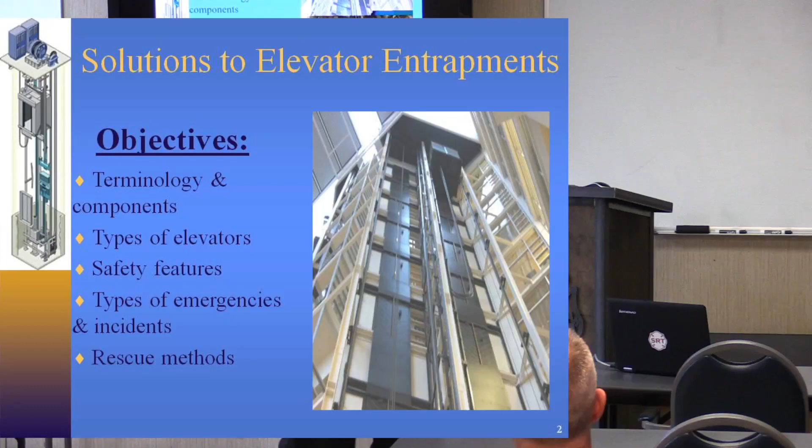I want to make sure the information I'm giving you is for public passenger elevators, not residential. When we talk about the anatomy, the machinery, and some of the different components, I'm giving information on public passenger elevators, because some of it will contradict residentials if you've had experience with them.

So we're going to go ahead today. The objective for today: in this morning session we're going to cover the terminology and components, talk about different types of elevators and their safety features, the difference between an emergency, an incident, and an entrapment, and obviously what we're here for is rescue methods. Give or take questions, we'll be in the classroom for about 3 hours.

After that, I've been told we're doing a working lunch, or kind of a quasi-working lunch. Afterwards, representatives from your agency have already predetermined elevators that I know nothing about—haven't been to them, don't know what they are. We'll go out and I'll show you my procedure, taking you from simple to complex, ultimately ending up picking the elevators with the kits that'll be on your rigs, okay?

And I'm here as long as you guys want. The class is typically 8 hours, I was told we go till 5. I get it, we're in the fire service, you guys got to go back for dinner, some of you may be disrupted for calls. I'm not watching my clock. That 8 hours—it's not that I'm loading up and going.

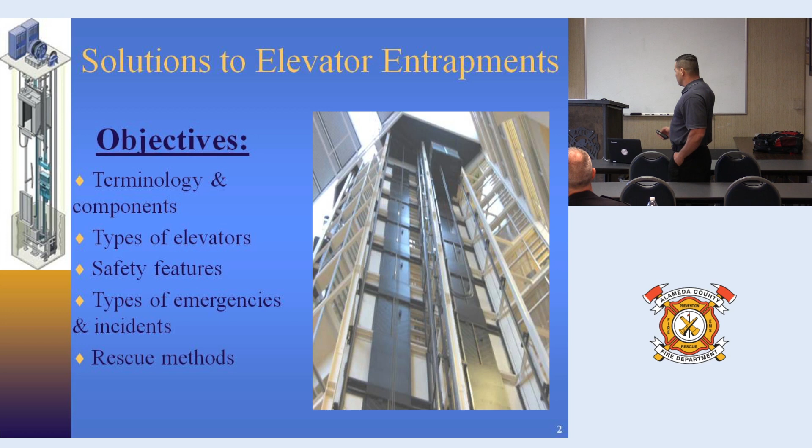If we're in the middle of something, or maybe another elevator comes up that we didn't set out to attack today, we'll go to it, all right? You'll find out I want to give you as much as I can while I'm here. When I leave, anything that comes up that we didn't address today, feel free to get a hold of me.

All right, so remember as we go through this: all elevators are not built the same. Elevators installed in different time periods conform to different requirements and codes. Elevator features and operations may vary from one elevator to another. We're going to see that today.

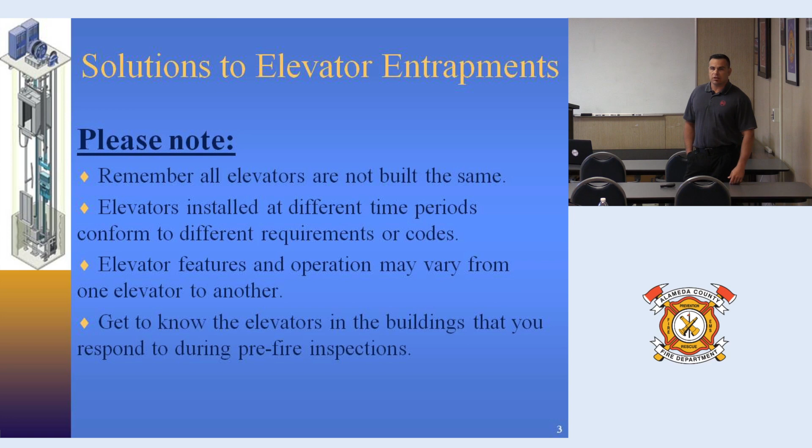Get to know the elevators in your district. I don't know if you guys do engine company inspections, but if you don't, you're getting out, you're pre-planning. Hopefully after this, like the agencies I've been to, I've motivated them to get out and assess their elevators, figuring out what they are and implementing what I give you today. After you clear a call, you're on a medical aid—take a look in there, hit the elevator, open it up, look up inside, look around, all right?

So just like you see here, I don't need to beat that up, but we'll get into the anatomy and then the physiology. I'm going to explain to you how the elevator works and why we can do the things we're going to do today.

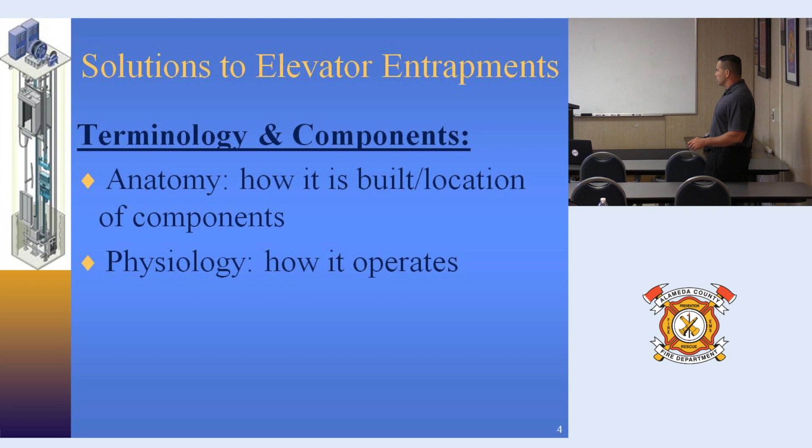Before I get too far ahead of myself, the start of where we're going to go through this PowerPoint—your handout follows along with it as well. We're going to get into all the different components of the elevator, so when we go out and reference something this afternoon, I want you to know what I'm talking about, all right?

What I've done here, as we go through some of these different components on the elevator—this is for my visual learners in here, like myself. Imagine this: if you were somewhere and you were going to hit the call button on the wall to call the elevator, that's a hoistway door you're looking at right now, okay? So if you're in the lobby of an elevator, you push the call button, you're looking at the elevator waiting for the damn thing to open because you want to go somewhere. That's what you're looking at—the hoistway door, okay?

Now I'm going to turn this around, and what you don't see on the other side when the elevator is closed is what we're going to be talking about here. So where that's saying interlock box—this is the interlock box right here that's up in the header of the elevator, okay?

And that's what I'll get to in a second, is what retains the keeper, all right? So as you see there, when you go out into your districts, you'll see this happens to be a Dover. Some of them are just a label that's stuck to it, some are riveted, and some are engraved.

But the program that I've put for you today, it's not an always, every time, it's a majority, okay? So the kit that I've provided for you is not based on what the manufacturer of the elevator is, it's based on what the door hardware is, all right? But you won't necessarily know that ahead of time. You will be able to go into the machine room or elevator room once you've made access, and you will be able to see what the manufacturer of that elevator is.

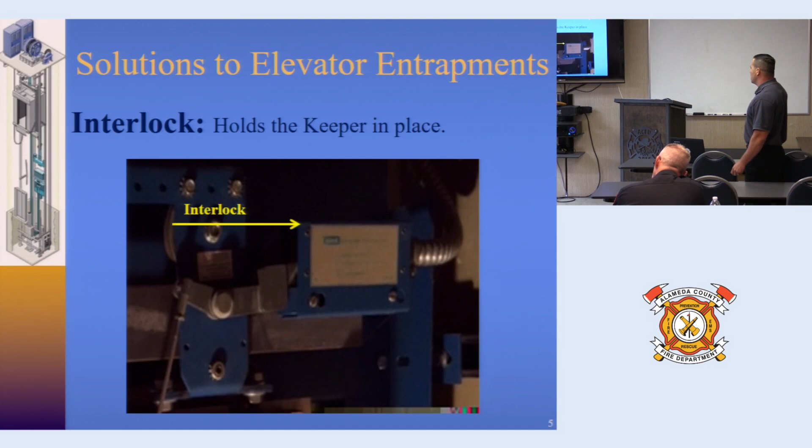So I'm not going to read all this to you, I want to pick up some time because I'm sure you're like me, we want to get to the hands-on stuff. So this follows your PowerPoint, and it basically tells you what the interlock does. The interlock, you see the keeper in the door there in the upper right-hand corner. You'll see coming to the next slide.

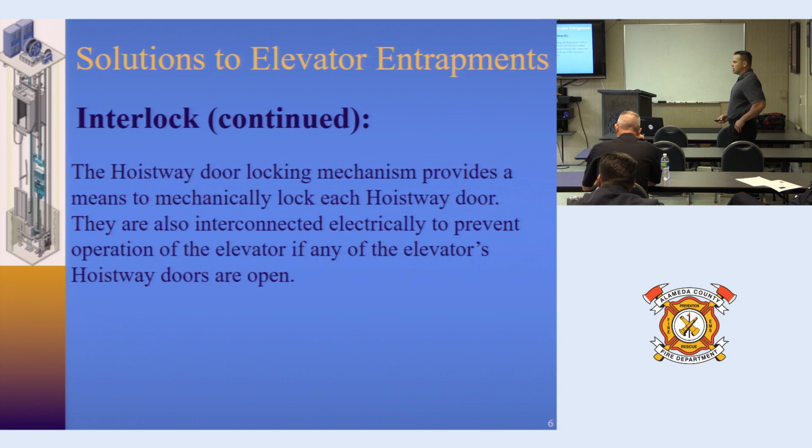What the interlock box does is that's an electromagnetic connection, and that keeper box is a circuit, but it's also a mechanical device that holds that hoistway door locked, so we have security when the elevator runs up and down in the shaft. We don't have an unprotected hoistway or elevator shaft.

It completes a circuit just like on your ladder trucks, the outriggers. So if the outriggers aren't out, it won't let you put the aerial up. It won't allow you to bring the outriggers in if the aerial's up. Same thing here, it closes that circuit and tells the circuit board: hey, I have a hoistway door open, the shaft's unprotected, don't run, or it's closed and secured and it's safe for the car to run.

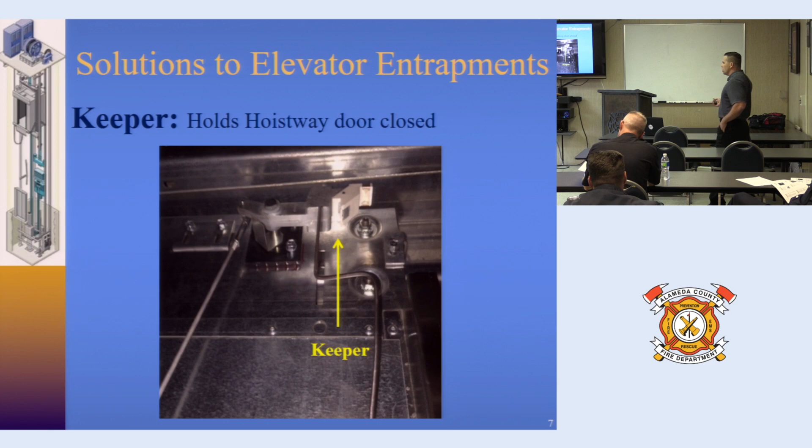We're either going to have door clutches or what you call a bayonet, okay? A door clutch will always be like so, whether the pickup wheels come down in it and sit horizontally or they're vertical, but they'll come down and meet and set in that door clutch. Or you'll have a bayonet, which looks like a bayonet or a rod, that you will see today on our Otis, and it will come down and split two pickup wheels and go down in the center.

So either the pickup wheel assembly fits into the clutch, or there's a bayonet that comes down and splits the pickup wheels. And I guarantee I see a lot of faces like, what is he talking about? It'll come together this afternoon. Just think of this as an orientation or exposure right now.

What this allows is this is going to be on the car door, and this is on the hoistway door. So when I say hoistway door and car door, I don't want to insult anybody's intelligence. Everybody knows what I'm talking about? Okay, perfect, I appreciate it, Cap.

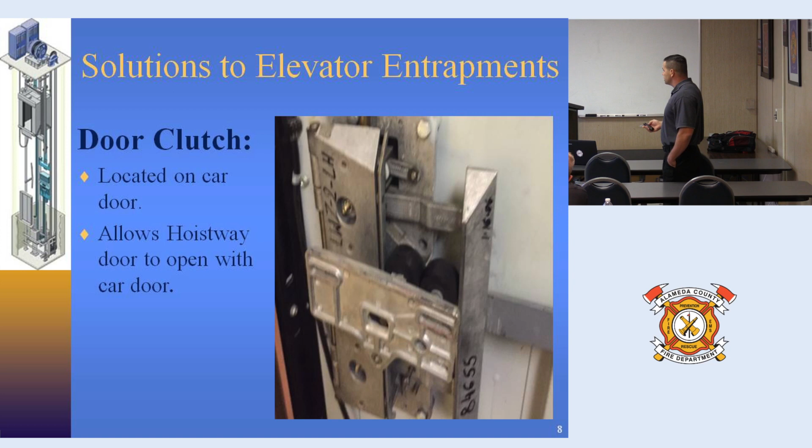In your PowerPoint, you can see the picture that should be there. But that's pickup rollers, these are pickup rollers right here, okay? And this is going to be key to remember, however you want to remember it: skateboard wheels, roller skate wheels. I want you to have a visual in your head of that, because that's going to impact later on.

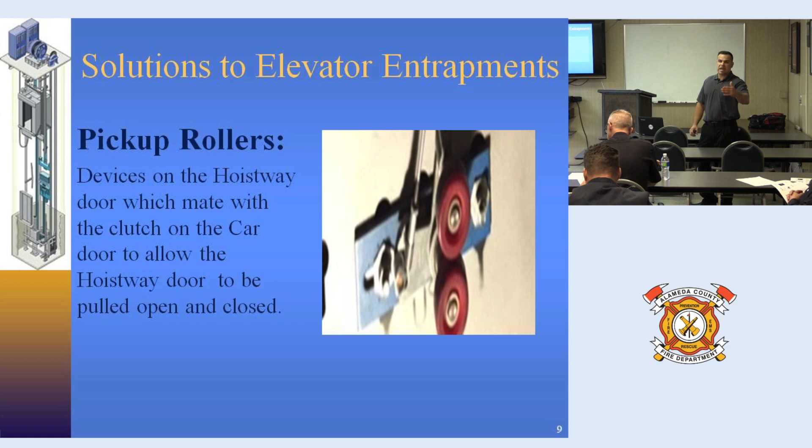There's three different ways that we can attack a door. We can do an outside-in rescue, inside-out, or a combination of the two. And that's why it's so important that we know the anatomy on the back side, so we can communicate that to the occupant trapped inside, if capable, to assist us possibly with resolving the entrapment.

So door gibs are basically a nylon or composite material. All they are is a guide on the bottom of the hoistway door. If someone were to lean or put pressure on the hoistway door, it keeps that door from swinging in or out or being able to push in the car door. So it allows, when the car door opener opens up the hoistway door, that door to move laterally, or in the horizontal plane, back and forth without swinging in or out. Okay, so that's a door gib.

Located at the base of the door. We'll talk about those a little bit more later. And in the field, we'll have to address those and figure out how we're going to work our picks around them.

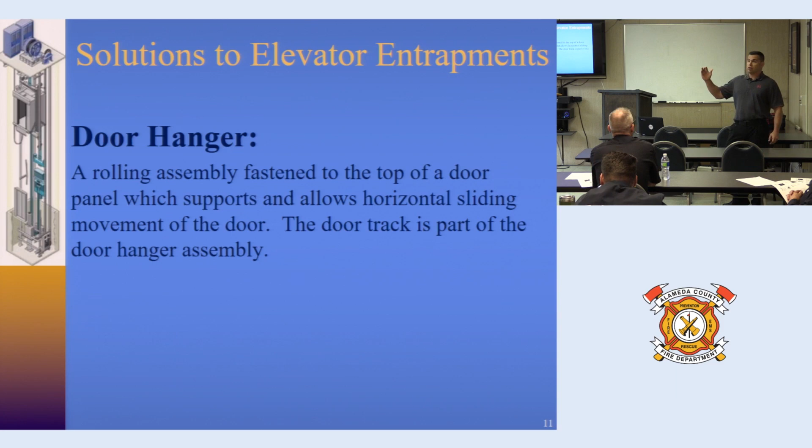Door hanger is just like you see at the top, just like on some of your sliding closet doors at home. Most of them will be an open hanger. There are some manufacturers out there now, Thyssen, the new Kones, that have what you call an integral door hanger. It's solid all the way across the top. We'll talk about that a little bit more when we get out into the field.

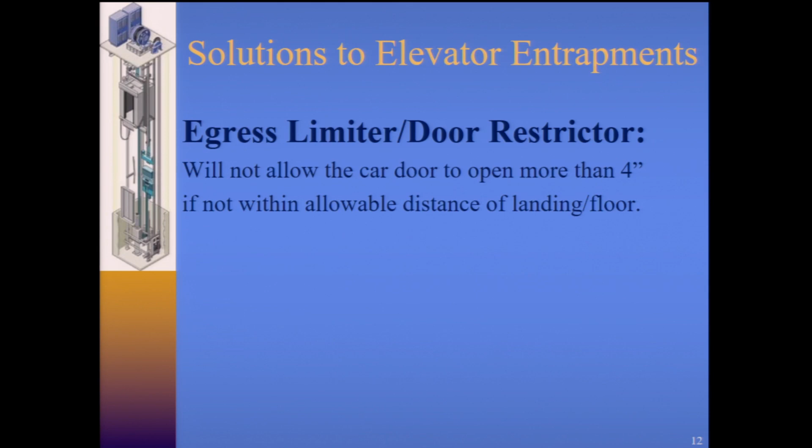So before I get too far ahead of myself, so some of this makes sense, I'll explain it a couple times throughout to reinforce this. I want you to write down, it's in the PowerPoint too, Class 2, Class 3, and Class 4 elevators. Don't worry about Class 1. It's not a class of elevator, it's an administration code.

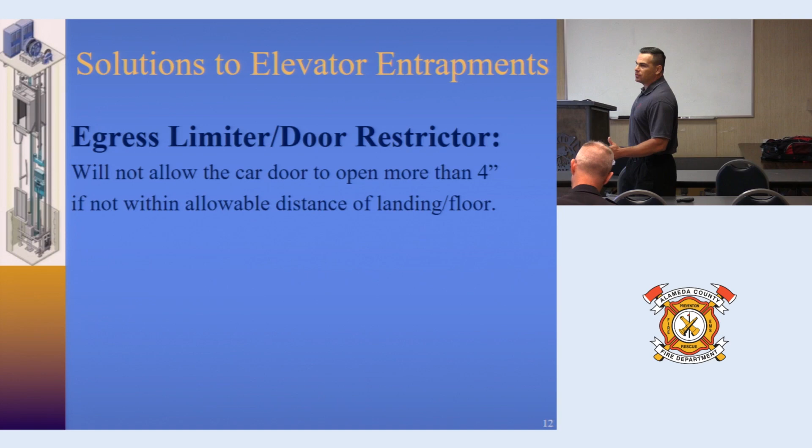So Class 2 is going to be May of 1998 and prior. Class 3 is going to be somewhere thereafter, or right around May of 98 up until October of 2008. Anything after October 2008 is going to be a Group 4. This is so important because with different codes and different requirements on these elevators, they're going to have different features on them, and I'll get into that a little bit more later.

But some Group 3s that have been retrofitted, not to say that you won't see it on a Group 2 — you could, and it would be something you should take a mental note of and document when you're out in the field — but some Group 3s, and all Group 4s with no exception, will have an egress limiter or door restrictor. Basically, if the elevator is not within its unlock zone, the door will not open on the car more than 4 inches.

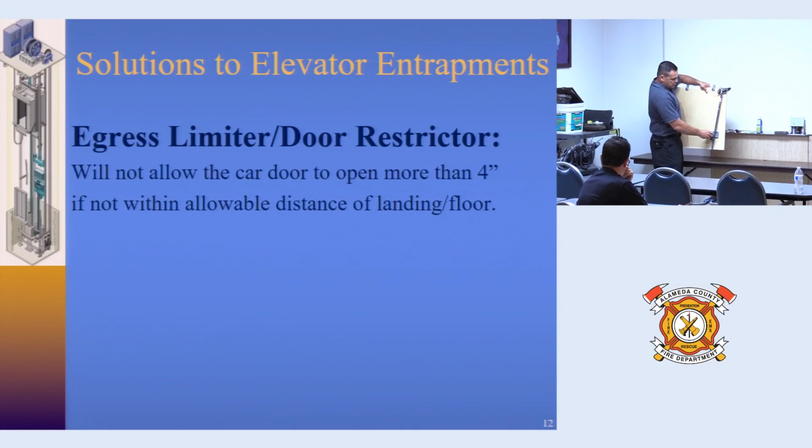I'll show you that later, and you can kind of see here, without the door clutch, when they put pressure on the door, essentially this would be down, and as they put pressure on this in the door clutch, it pushes and lifts the keeper out of the interlock box.

So on a group 3, okay, group 3. I'm sorry, thank you. Sorry, I said class before. Thank you, I got ahead of myself. It's group, sorry, all of it is group. Sorry, thank you for the clarification.

It's group 2, group 3, group 4. Sorry for the misunderstanding. On a group 3, depending on the door clutch or the bayonet, it's going to be 6 to 12 inches on the unlock zone. And a group 4 is going to be 4 to 6 inches.

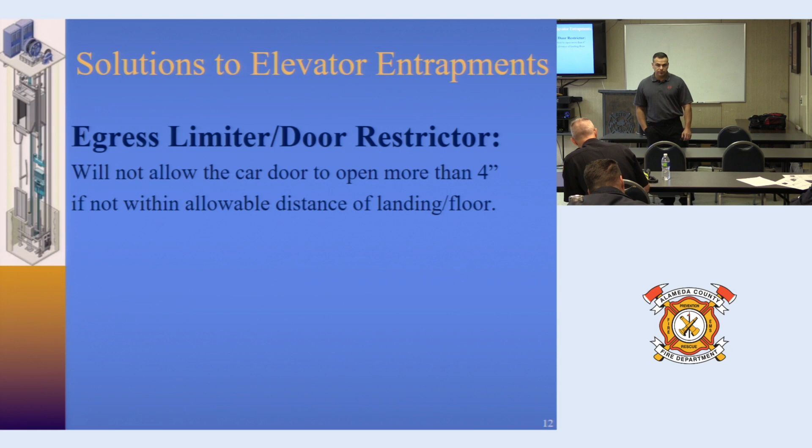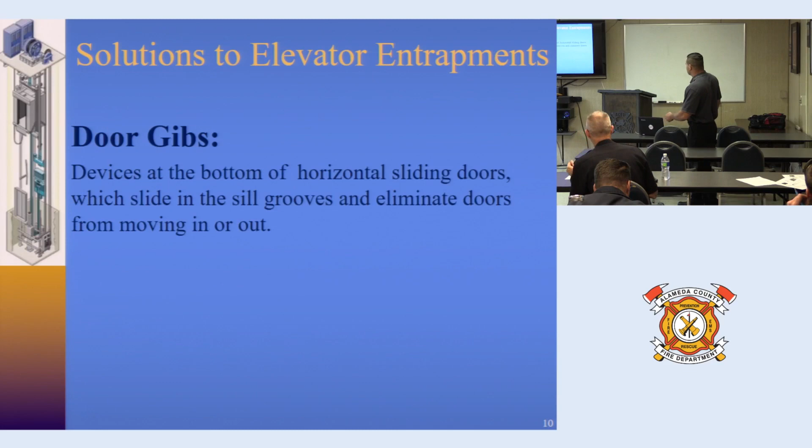The other thing is, when you go out in the field, let me show you this. So when you open up and you're looking in the elevator at the door clutch, basically from the pickup wheel assembly to the bottom, whatever that distance is, roughly cut in half, because that's where the pickup wheels like to sit. It's not exact, give or take, but it'll let you know what the unlock zone is on that elevator.

If you look, we're going to go to an Otis today that has a bayonet. The length of that Otis, you're going to see where the pickup wheels sit on there. The length from the pickup wheels to the top, or from the pickup wheels to the bottom, that's the unlock zone on the elevator.

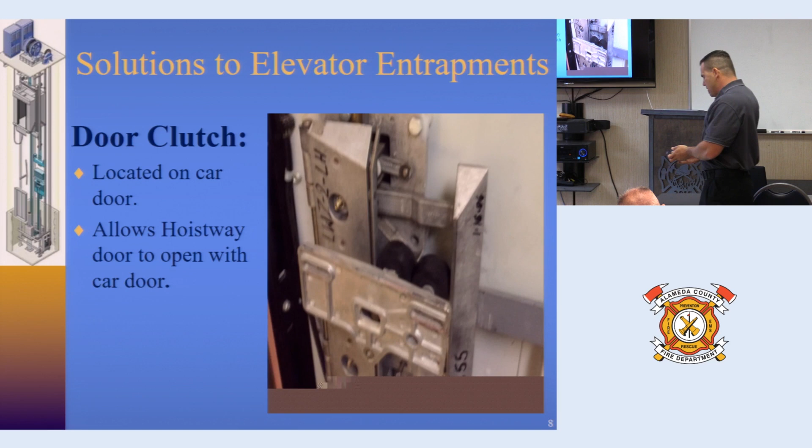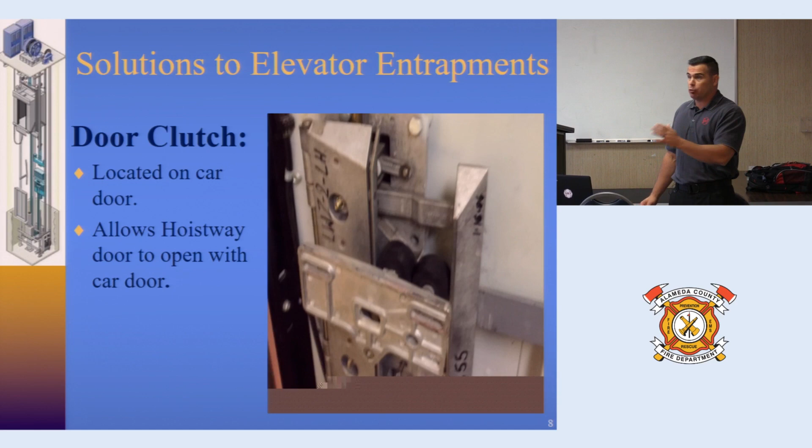And why that is so important is anytime we're within that zone, both doors will open together, whether I pick it from the outside and push it open together, or if I do an inside-out rescue if the occupant's capable of it.

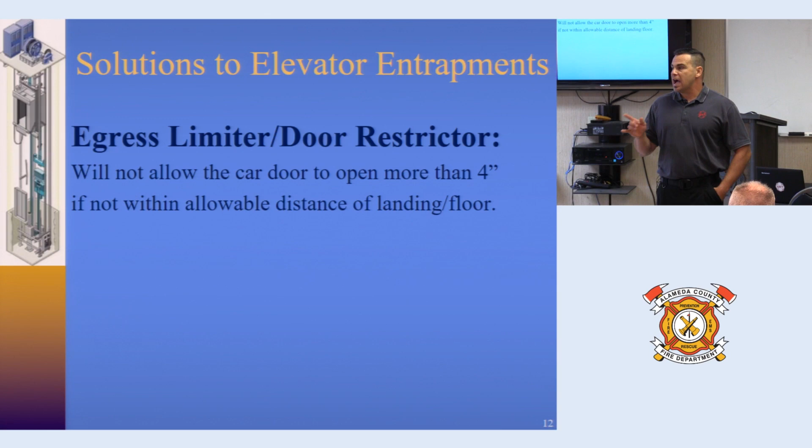The other reason why I share this with you is, how many people in here are familiar with going to hydro elevators and bleeding them down? How many of you is that your standard practice? If I wasn't here today and you rolled on an elevator entrapment right now, you would just go into the machine room and manually lower the hydraulic elevator. Is that what you would do?

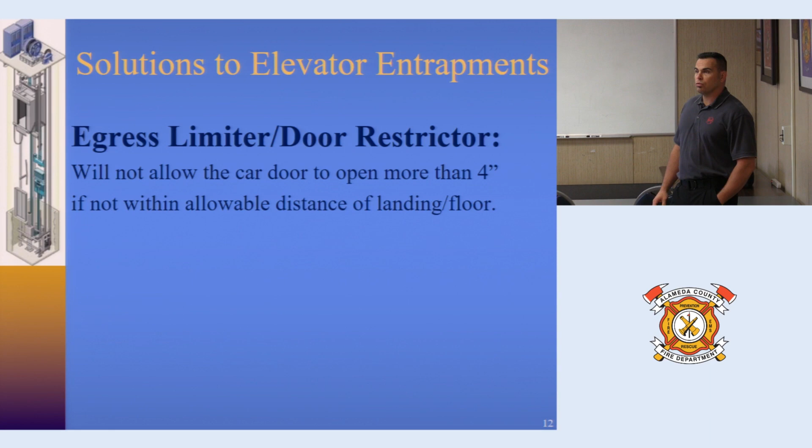Maybe you think it's stuck in between floors. If it's stuck in between floors, you want to lower it. If that's what I suspect, I'll lower it so it's at a floor. So, okay, you can do that.

Here's what I'm going to tell you too, is all group 2s and pretty much all group 3s, why am I even going to mess in, unless it's super high, you could try and put it on the floor. But what's typical height on your guys' hydro? It can't be any more than 6 feet, right? You usually, 6 stories, I mean, you normally don't even see them that high. Typically 3, 4, 2 stories, right?

Go in there and open up the manual lower and set it all the way down. You'll set it on the buffers inside the pit. It'll still be within the unlock zone. They push it open and they step out. No big deal. Here's what I'm going to tell you.

You go to a group 4 hydro elevator and you bleed that all the way down and put it on the buffers in the elevator pit, you just screwed yourself. Because the unlock zone was only 4 to 6 inches, you just skipped the unlock zone. And if you're not good or handy with the picks that I provided you, you're dead in the water now. The buffers are what sits in the pit of the elevator that the car rests on when it's all the way down.

If you open them up, they look like big coils or springs. That's the buffer, that's what I'm referring to when I say that. Okay, so here's what I'll tell you.

This is one of my always for the fire service, and there's very few always in elevators. If you're going with my school of thought and my training, I challenge you to reference this with any techs you come across: we never, ever blindly bleed down a group 4 hydro. Never.

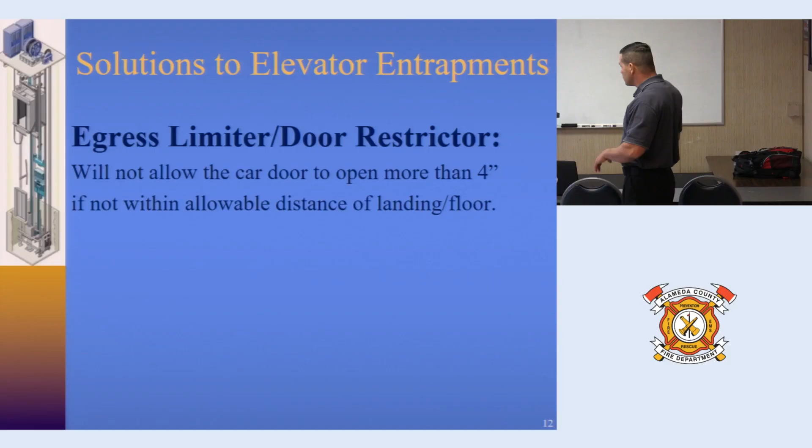I know I'm throwing a lot at you, all right? And I'm trying to get done close to lunch, and I have a tendency to talk fast anyways. So if I'm confusing any of you or you're not getting it, stop me, because I want to make sure I'm crystal clear. I appreciate the clarification between the group and the class.

And then as far as the Otis and the ThyssenKrupp, it's a manual bar. It looks like a piece of angle iron, if you would, that's on springs and it's at the back of the door. It's really simple: if you push and it doesn't move, you pushed the wrong way. You've got a 50-50 chance, push it the other way, and you'll see it releases, it's a mechanical bar mechanism you release, and you'll be able to open the door. Hopefully we'll come across a couple today, I'll be able to show you.

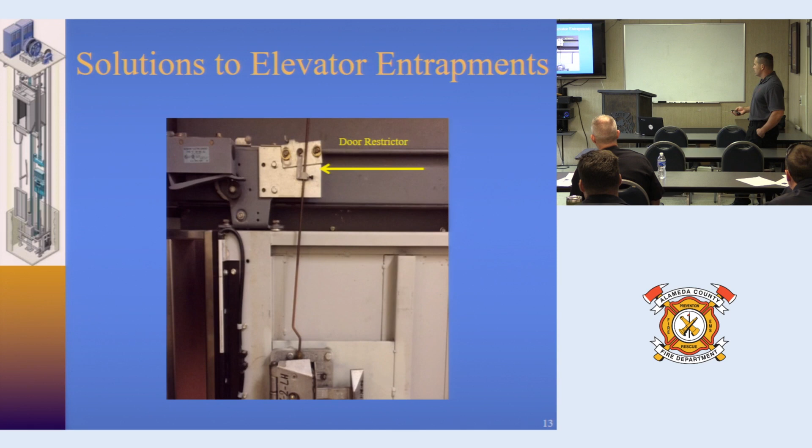That's the car door, right? Door restrictor, thank you. Door restrictor always, no exceptions, always on the car door. So this I'm showing you right here, this is a Kone, this is the door restrictor on the Kone. By simply squeezing this and operating this spring, as I do that and squeeze it, this comes back off that hook and it releases the door restrictor.

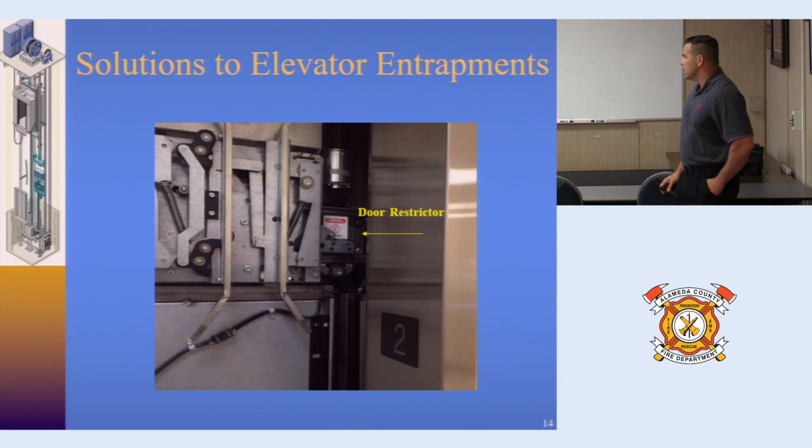Why is this so important? It doesn't do me any good if I get the hoistway door open and I don't know how to overcome the door restrictor, all right? So pretty much all newer Group 3s, some have been retrofitted, and absolutely all Group 4s all have a door restrictor on them.